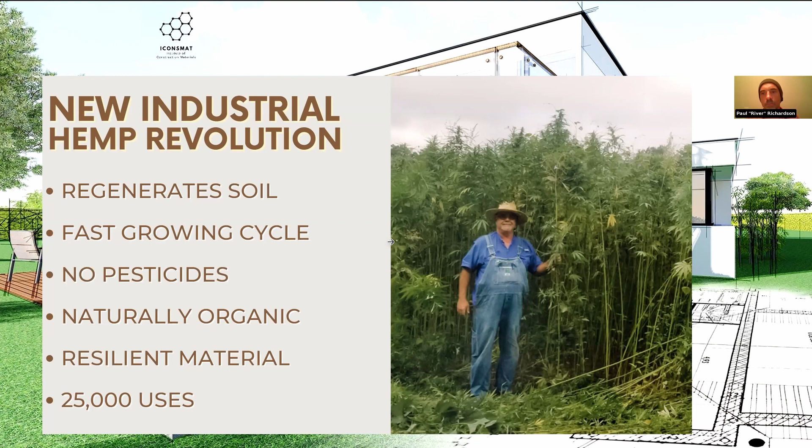Thank you. It needs to be dialed in that respect for the region, and a lot of nations are still working with the right seed genetics for their location, because the history of this plant, a lot of that knowledge and a lot of those seeds were lost, especially in the US, how it was outlawed for the last almost 100 years. So it's really coming back now, and it's taken off in the US like nowhere else in the world. I think when the US gets into something like this, it has a real momentum to move to the next level.

And these materials are really transforming how we think about our homes. These are mold resistant. It's a mold resistant material. It's a high pH material. It's a breathing system. So instead of the typical building envelope where we're sealing it as tight as possible, we're using all kinds of products to make our structures watertight and airtight so they perform to a certain level. And when we say perform, it means that they can be recorded.

Because it's all about creating systems. The building industry is being based on systems, wall systems, and other things that can be quantified, which I think is really to the detriment of the industry, because it's not allowed for natural materials to really get into the position that they should be, because it's hard to regulate a natural material. There's a lot of variations that happen in natural materials that are not quantifiable like a lot of these other building materials.

But things are shifting, and this material is really resilient in a lot of respects. It's fire resistant, it's pest resistant, mold resistant, as I was saying. It has a very high insulative value, especially when we use it as a fully encapsulated system. Typically hempcrete is being used in cast in place. Really, it's a non-structural material that comes from the center of the hemp plant, the stalk of the hemp plant, the shiv, which is processed down into small pieces around 1/2 inch or 1 to 2 centimeters, you would say in the metric, and mixed with a hydrated lime, mixed with the binder as well.

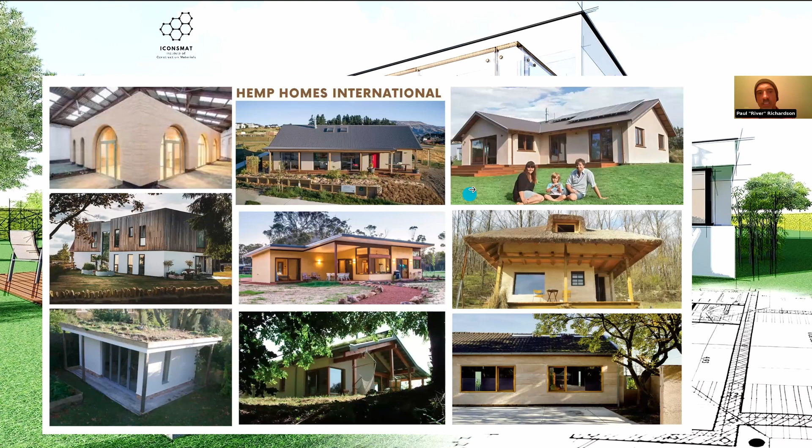And it can be sprayed in, it can be used in our wall systems, in our floors, and our roofs. As you can see here, the picture on the top right is a home in Australia. There are a lot of examples of these homes all around the world, which are really taking on a new form, creating a new type of architecture. Then you get into the interiors of these homes, and it's a really beautiful material. It's not just ecological, not only a breathing, healthy system, but a really beautiful home. We've been working with this material for the last few years, and the final product and experience of these homes is really different than a lot of regular homes.

My first hemp home experience was in the mountains of Switzerland, in the snow, minus degrees outside, 3 feet of snow, and we didn't have heat on in the house for 2 weeks, and it was like a fresh air environment. We're walking around in shorts and t-shirts. This was like a sea change for me as an architect, as to a building material that could feel like an outdoor environment. And then it can store heat energy in the walls because it has a thermal mass quality to it too.

But in the industry right now, there's a lot of issues around architects not really taking this on as a building material with their clients, mostly because the building code is not up to par. I've been in a process of getting a hemp addition on a house in California through permitting for almost 2 years now. So it's kind of crazy that this building material is not there yet.

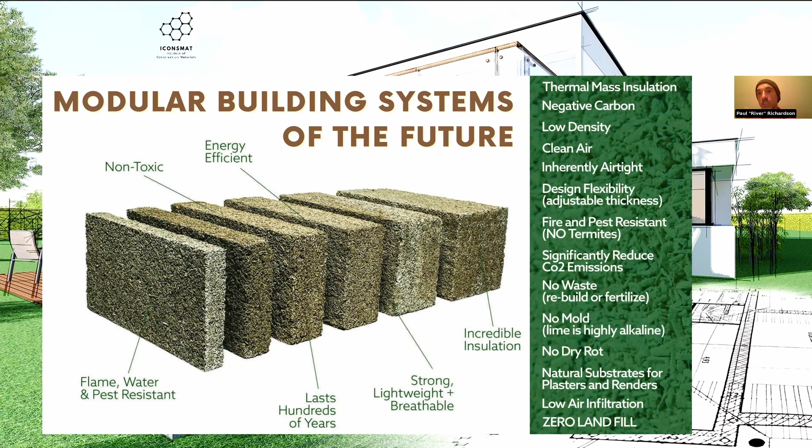The hemp building blocks are starting to come onto the market in the United States, and that's going to shift the building industry, I think, here. In 2024, we're looking at it being adopted into the residential building code in the United States. So there's going to be a big change in that respect.

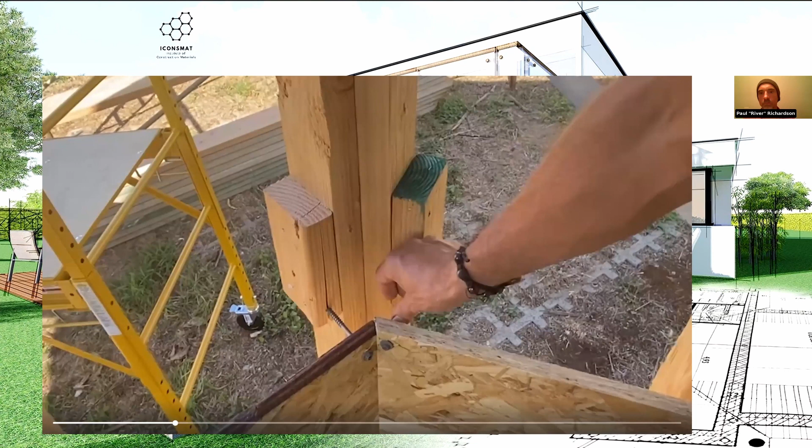These structures actually regulate the indoor environment in our homes by exchanging and purifying the very air we breathe, and they can be built in any climate.

We have put together a comprehensive course for ecological construction with Hempcrete, including live footage from actual builds, complete with project blueprints and resources to guide you through the process from design to finish.

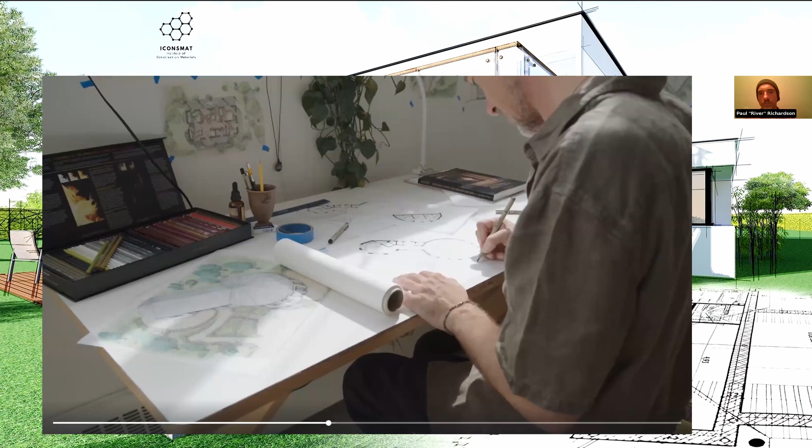We take you through the entire process and share all the details you'll need to know for building with Hempcrete along the way. After 2.5 decades working as an architect and project manager internationally on projects built with the standard unhealthy toxic materials, I shifted into natural building space in search for answers, and I've discovered the next level of construction through experience in hemp buildings in Europe.

What I quickly realized was that there was not a lot of information out there about building with this amazing material, even though they've been working with hemp for over 3 decades in Europe.

So in 2018, the same year hemp cultivation was legalized in the United States, I decided to start offering hands-on trainings in hemp construction. And in 2022, I began documenting the process so that I could offer a useful step-by-step course to show all aspects of building with hemp.

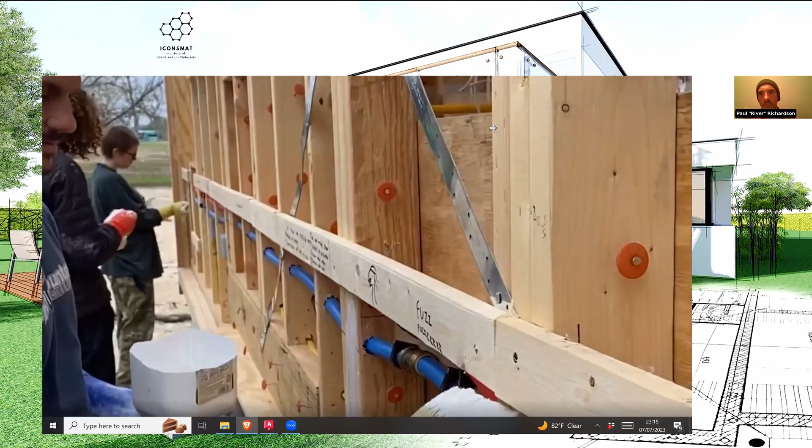And the great thing is that the course is ongoing and interactive. We continue to add content for new builds and host monthly Zooms where you can get your questions answered and meet other hemp builders. So we keep learning, and so do you at your own pace.

We'll provide an overview of the course, highlighting the benefits of building with hemp and setting the stage for an exciting learning journey. You get exclusive access to several of my architectural designs for hemp projects valued at over $1,000.

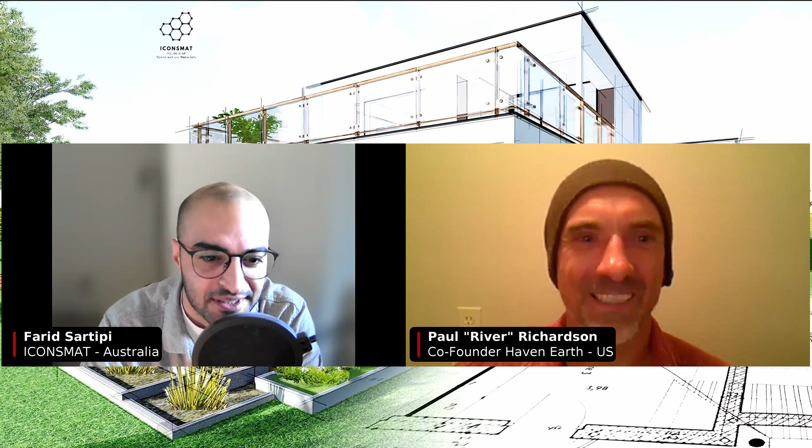Hi Paul, good afternoon, thank you so much for this wonderful presentation. I've never heard of using hemp as a construction material. Just had a quick question about whether it's being used as an insulating panel, being a thermal insulator or soundproofing isolator, or can it actually serve a structural functionality as well?

Couple of questions. Sound quality is amazing with Hempcrete. It has a really high decibel rating for sound absorption. So it's great for like a recording studio, it's great for a party wall between dwellings. And it's also a fire block as well. It's becoming a big thing in California because of all the fires, where they're looking to bring hemp in as a fire-resistant material.

It's still not classified as a structural material. It doesn't have the load-bearing capacity. It does have beneficial strengthening of the frame, so it will strengthen the actual wood frame of a house because it will encapsulate that frame and stop it from breaking, essentially, from snapping.

So we have some high-profile academics like Professor Veena here who might be able to get some research done about using this material as a structural element as well, because the University of Nebraska is actually working on a structural hempcrete formula right now, and their first tests were incredible. It got so hard that they couldn't break it out of the mixing machines, and yeah, it was actually too hard.

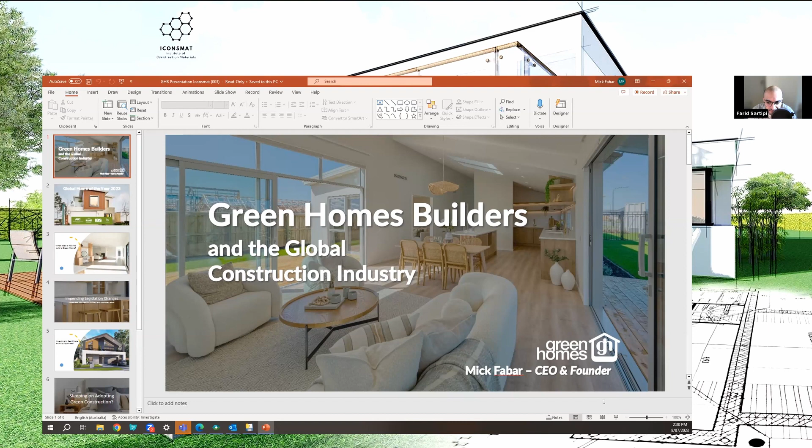Not sure, maybe try the bottom right corner, it has a presentation thing. Where is it? Bottom right. Yep, that's it. Oh good, oh yay, very nice. Thank you, Farid. All right, I'll mute myself and we'll pass it on over to Mick.

Okay, thanks guys, thanks for the invitation, happy to have a chat today. As per my introduction, I'm the founder and current CEO of Green Homes Builders, and we operate in Australia, New Zealand, and the US under a partnership franchise model, with over 100 builders operating under our brand throughout those countries.

As our name suggests, we specialise in green homes - homes that are energy efficient, sustainable, healthy, and environmentally friendly. We have a bit of credibility, I suppose - we've built thousands of green homes, the highest rating homes in Australia and New Zealand, and that's our plan in the US.

We've only been on the ground in the US for about 4 years. In January this year, one of our projects in Perth won Global Home of the Year from the National Association of Home Builders in the US - probably the biggest award a builder could win, I would think.

This particular home is a show home in Perth, Western Australia, in a warm climate. It's the highest star rated, most efficient 2-story freestanding home in Australia.

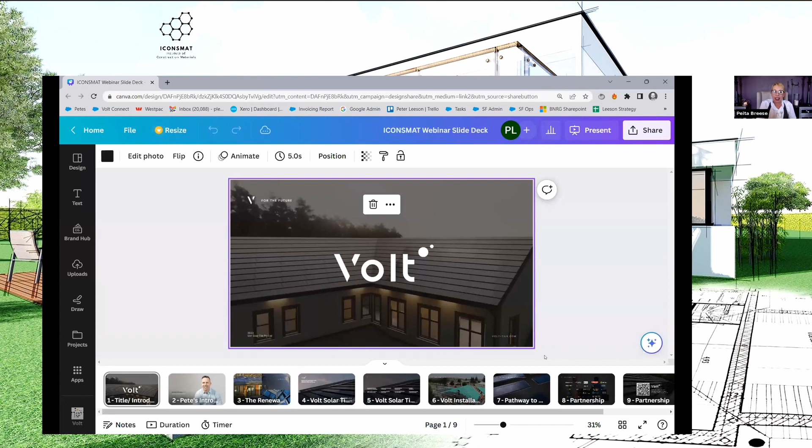Okay, so that was the introduction, and I think probably most of the presentations, I don't need to say too much. I'll talk about Volt Solar Tile today, which is an innovative new product. First, I'll just talk a little bit about myself. So I've been in renewables for 16 years, and been in the built environment for 24 years.

I'm an electrician by trade who has built a business up around solar farm development. We develop, build, own, and operate solar farms here in Australia and in some international JVs. We have our C&I and residential solar business, and then we also have Volt Solar Tile, which has been a product under development for about 8 years and was launched in October last year. It's now been installed in Europe and Australia. We're about to install the largest solar tile system globally in Turkey, and we're doing UL testing for entry into the US right now. We're launching our first project towards the end of the year.

So basically, in the built environment, there's a few different options when it comes to solar. You can have standard attached, which will remain pretty standard for flat metal roofs because you can't see the product, so it's the cheapest alternative for renewable energy. You've got facade and windows, whether it's a curtain wall or a solar glass roof or a solar glass window - very inefficient products, very expensive, and low energy generation because of the aspect of the sun. You optimize at a 90-degree angle from the sun, so it doesn't make a lot of sense because you're going to get low yield, and it's very hard to maintain the product.

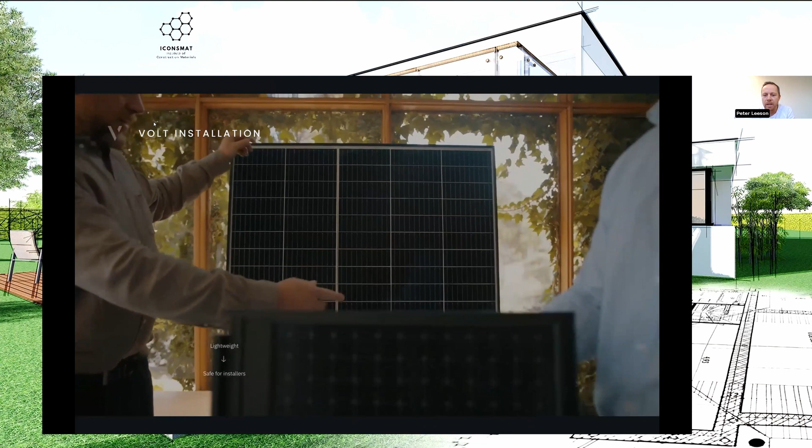So here's just a little bit of footage of a system that we installed in Adelaide, South Australia. That system just shows that it's a standard roof / solar tile. I'll wait for it to link back around in the loop, but basically the footage is just showing how the system interlocks.

There's a system that we installed in France in January this year, and you can see that's on the southern aspect of the roof, and it just integrates. One of our installers is just fixing a solar tile in, so it fits like a standard roof tile, except it fits from the back. Very easy to install.

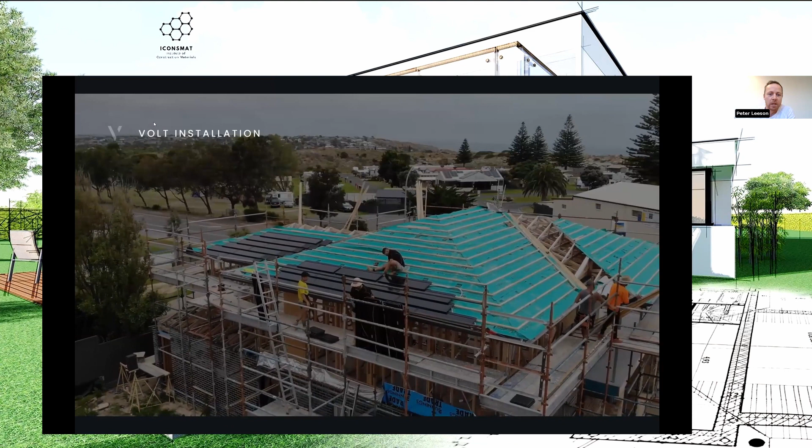The design of the product also has a very strong mullion at the top of it, which means from an installation perspective, you can actually kneel or put your foot on top of that solar tile and it won't damage the product. Here you can see the product's actually just interlocking in—two solar tiles can just lock in together like a standard roof tile. And the next one will show how it just locks into the watercourse and overall standard roof tile.

So here's the system again, just showing how our interlock works.

We've got a manufacturing business case put together to start manufacturing our product in Australia. It's a 2-stage approach. First, we'll be manufacturing the extrusions in Australia and cutting and assembling the product here using a laminate made by our existing manufacturer internationally. Stage 2, happening next year, is to actually make the solar module here.

There's one other solar module manufacturer in Australia currently, Tindo, who just makes standard solar panels. We will be pretty much the only solar manufacturer capable in the next several years of actually exporting in volume internationally, as we've already got the distribution channels and can compete at the same price due to the complexities of our design.

The extrusions are a big part of the cost of the product, because we need 4 different extrusions wrapping around solar cells to meet the same requirements as a molded product, and a roof tile is a molded product. So it's a very complex design, and assembly is very difficult to do unless you're doing it in volume.

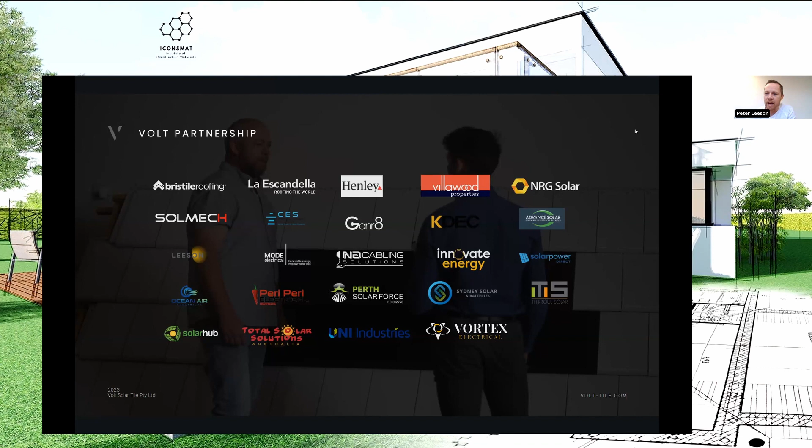All right, so Farid has a question for us. Hey Peter, thank you so much - it's brilliant to have an Australian manufacturer of such architecturally unique solar.

I'm not into the market as much as you are, especially in the solar market, but I remember a few years back there was a research project promoting use of graphene particles instead of silicon-based solar panels, which would enable generating more, better efficiency in terms of harvesting solar energy. Is that in the market as of today, or?

No, so we've hit about 26% efficiency. Theoretically I believe we can get up to about 30, but we'll be looking at TOPCon - that's using a very thin film cell on top of a polysilicon cell. So you're going to be adding about 3 or 4% to the cell efficiency.

One of the key things to understand, though, is we can keep pushing up efficiency of products, and that's fantastic, but we don't have a footprint issue or a land area issue. The issues when it comes to energy are cost and firming - being able to use that electricity when it's required. So the new cell technologies are getting there: graphene, perovskites, different thin film products, TOPCon cells.

From that context, I'm sure Anirban, you'd probably like to share a little bit of this journey around what we've been doing with the manufacturing space, looking at what has actually happened over the last many years. Perhaps if you want to talk about how different product opportunities are constantly being developed, but also equally importantly, as we've alluded to, the fact that whether it goes into any product opportunities, the critical focus of our microfactories always has been to be able to have these kinds of decentralized manufacturing capacities so that local supply chains of waste glass, waste textiles...

The whole ethos of microfactories has been very much around what can we do in the local regional setting? No matter where you are in Australia, and indeed taking this out to the world, we can actually source local materials. But the important part, ultimately, is that important question - are these products fit for purpose? Are we creating local jobs, for instance? So lowering our carbon footprint really comes from the fact that we can recycle, remanufacture, and be extremely efficient in the way manufacturing takes place.

But I might throw the question back at you, Anirban, if you wouldn't mind taking us through some of these diversity of products we're looking at, zooming in on each of them please. So I guess over the years, the way the product is developed - because we started from the scientific end, there was a lot of development in the engineering and understanding of the waste and what it can be converted into and what kind of properties it can meet.

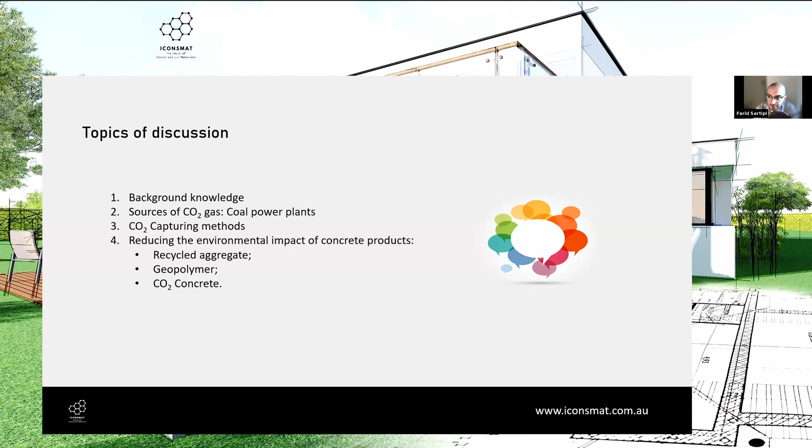Our topics of discussion today are a bit of background knowledge: the sources of CO2 gas, especially in Australia, like where we can find CO2, how do we source the CO2 gas, and what capturing methods are currently available. And also, at last, multiple types of reducing CO2 emission in the midst of manufacturing or producing construction materials, especially in concrete products.

I'll try to cut my presentation short to enable other presenters to present their outstanding achievements. As for the background knowledge, CO2 in concrete was a topic that's been introduced, if I'm not wrong, more than 20 years ago.

Physical entrap is the most basic approach to absorb or capture CO2 in concrete, applicable in recycled concrete materials, targeting recycled aggregate. What happens in the physical entrap approach is that CO2 is being pressurized in the chamber at the presence of recycled aggregates.

The claim is that recycled aggregates will start absorbing CO2 by mineralizing the carbon and oxygen molecules into different sort of molecules, which eventually makes CO2 gas, as a harmful greenhouse gas, disappear.

The chemical decomposition, however, which is the most recent technology — I guess one of these companies in the United States has started commercializing this approach as part of the CO2 concrete project — is applicable in all types of concrete, meaning you won't need recycled aggregate as a necessity in concrete.

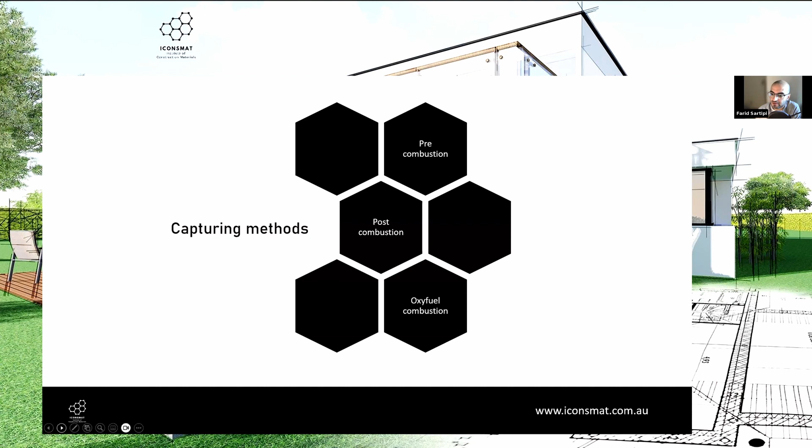The pre-combustion carbon capture is a technology that enables the introduction of oxygen and coal into something called a gasifier. Once the gasifier generates the CO2 and water, the steam goes inside this shift reactor, and that shift reactor will generate CO2 and hydrogen separately for us.

From there, we can entrap the CO2. And remember, these are all happening inside a coal power plant.

Post-combustion carbon capture, which is our main area of focus, is where fuel and air go into a boiler. The flue gas, which is 15% CO2, is being absorbed by amine absorbents.

So we have monoethanolamine — it's a bit of a chemistry background — or hot potassium carbonate, or chilled ammonia ionic liquids, and other techniques to absorb that CO2. But we take monoethanolamine or diethanolamine to absorb the CO2, and then we can mix it with some sort of concrete chemical admixture to obtain a high-performing CO2 concrete.

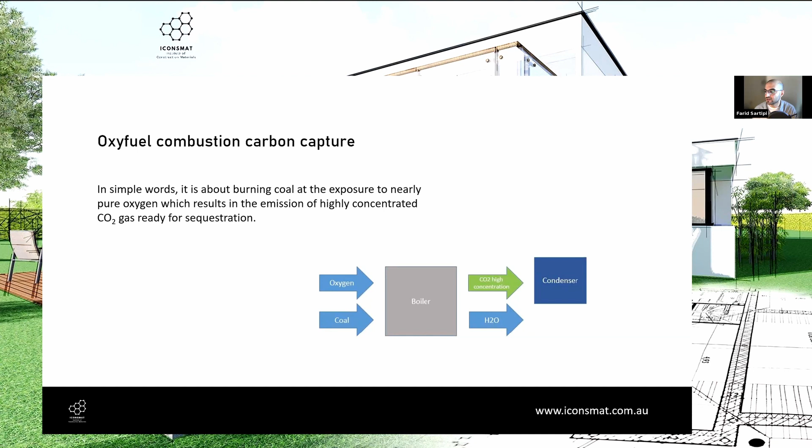So the other method is oxy-fuel combustion carbon capture. As far as I know, this project was introduced about 10 years ago and funded by CSIRO, but it's never been continued because it's been claimed to be so expensive, and the industry was a bit hesitant to uptake this technology.

CO2 capture from cement production is another alternative to think about. You can't just focus on coal power plants. We have other cement plants generating way higher, larger amounts of CO2 than coal power plants, so we may have to think about cement production or cement plants as well.

So far, we know how to find and source the CO2 that needs to be converted into other chemical forms rather than being released into the atmosphere, causing global warming and other harmful effects. Now the question is, how can we use CO2 in concrete? We know how to source the CO2, but in practice, how are we going to use that CO2?

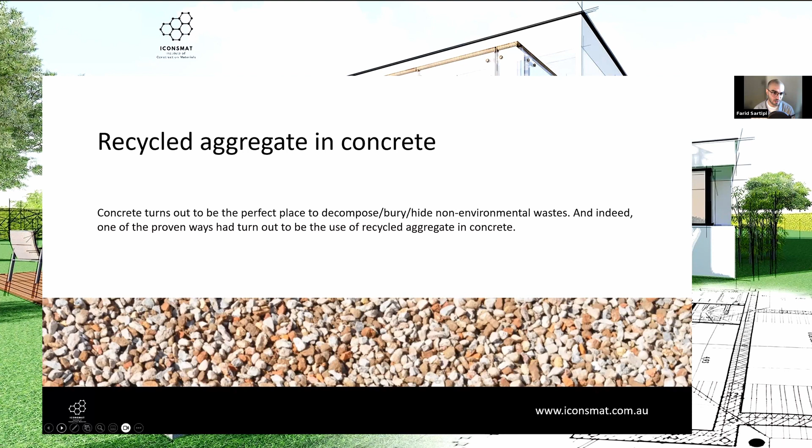The most basic approach is to have a recycled aggregate, and recycling is the most well-known approach to reduce the carbon footprint of construction materials. In the study, the disadvantage of using recycled aggregate in concrete is the low workability and low compressive strength obtained by mixing concrete with recycled aggregate.

There's something called geopolymer concrete, concrete without cement. We're replacing cement with fly ash and slag, plus something called an activator, which is normally sodium hydroxide, so a concrete block is made without having cement. By replacing cement with fly ash and slag, which are waste materials from other industries, we can reduce the carbon footprint of concrete.

Because of thermodynamics, these two variables can change the properties of the new concrete chemical admixture, meaning how much CO2 can be absorbed in this admixture and how much cannot be absorbed in this admixture as well.

I'm just trying to find my way back here. I think you need to end the presentation before I can return. There we go, I should be able to get back in now, hopefully. What's going on? Can I get back in? Oh yeah, sorry. Start video, sorry, I was trying to figure out how to get back in. I can't add to the spotlight. Sorry, okay, here we go.

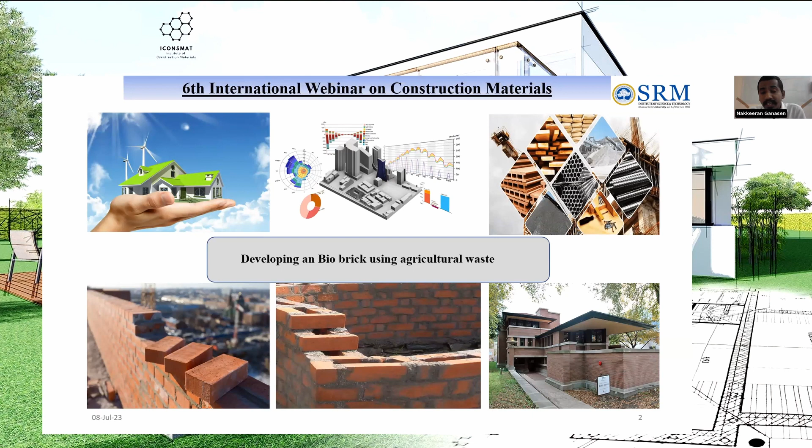My topic today is the development of biobricks using agriculture waste. Everyone knows building materials need alternatives because of high demand and depletion of natural resources, so we need low-cost, lightweight alternative materials.

We found that agriculture waste is dumped heavily in developing and developed countries. We worked in India, which is mostly an agriculture-based country, so we chose agriculture waste to implement in construction materials, replacing fine aggregate and coarse aggregate. We finally chose fine aggregate as the best option for bricks, as a low-cost material.

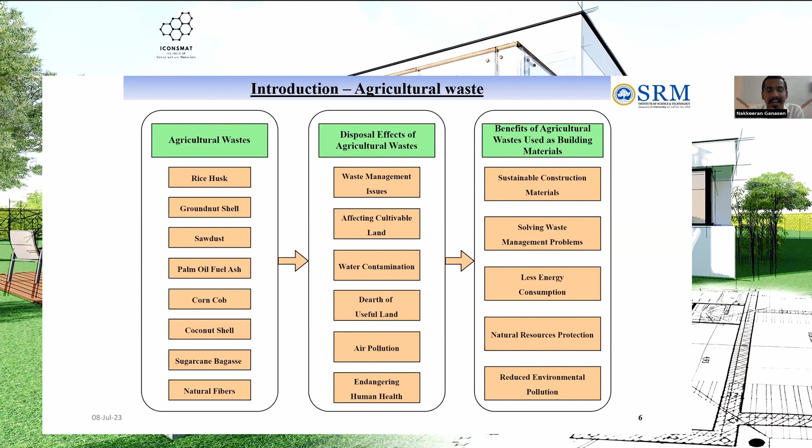These are examples of agriculture waste we get in India. If disposed of without reusing, we face waste management issues, water pollution, air pollution, and more. If we can use this waste in low-cost building materials, we can create sustainable materials, solve waste management problems, conserve natural resources, and achieve many benefits.

We did a small literature review on this topic, which is common for this type of research. We found many papers published on using agriculture waste ash as a cement replacement, for thermal properties in panel boards, and similar applications.

However, very limited researchers are working with raw agriculture waste in the construction industry. I prefer raw materials because they're easy to dispose of when we demolish construction, and it won't affect society much.

Most research has been done on materials like sugarcane ash, rice, wheat, and wood waste. Very little research has been done on groundnut shell. We prefer groundnut shell because it has very low density, and most people have never used groundnut shell as a raw material in construction. We chose it as a low-cost, low-density material for good sustainable replacement of fine aggregate.

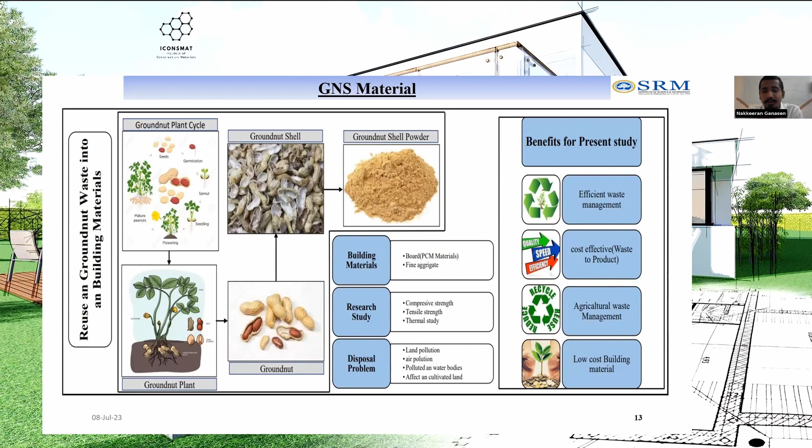It's been used in panels for thermal properties, but we tried a different approach using it as a replacement for fine aggregate because it's lightweight, low density, yet high strength. Previous literature shows it was only used in PCM boards as fine aggregate, not in concrete or biobricks - so we tried something new.

I used a very less amount of cement, just 10%, and recycled amounts of fly ash, lime, and GNS, and the sand. The sand used is very less, about 10% of the total brick, and 30 to 40% is replaced by this GNS material.

This is basic. First we collected the GNS materials and we need to grind it because the particle size is very big. So when using this, we cannot compress easily when making compression bricks. So first we need to grind the materials because the fine aggregate needs to be very fine. Based on that, we grind the materials using these machines.

Using this miller machine, it rotates for 10 minutes and we stop it, then we rotate again for 10 minutes and stop it, and we check until we get this fine aggregate truly as fine particles to replace the fine aggregate in the brick as a waste material.

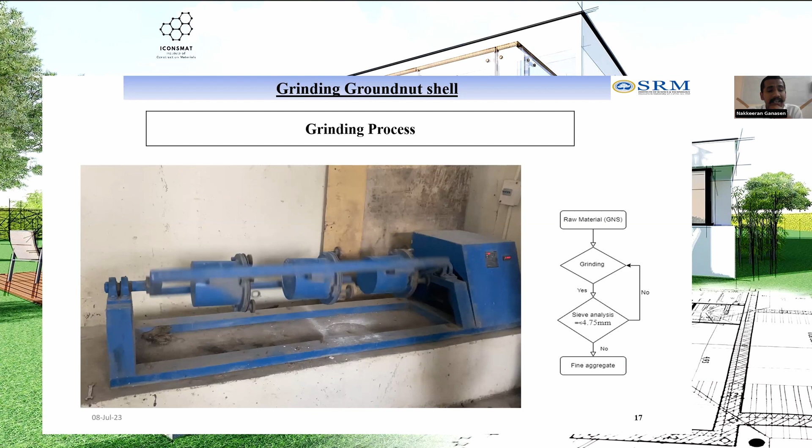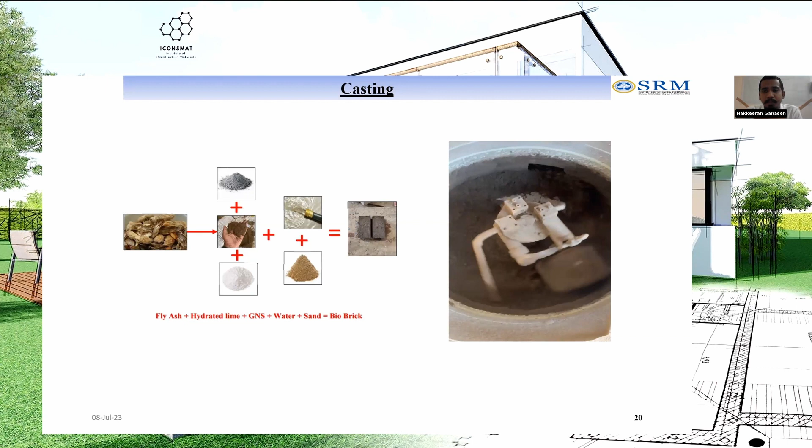These are the mix combinations we prefer. While using this GNS material, it is a little bit porous, so we plan to grind it properly and mix it in this kind of mixture.

We properly grind and mix these 4 materials - the fly ash, hydrated lime, and the GNS. While using this grinding, we reduce too much of the pores in the brick.

After that, we convert it and make it in the compression machine. It is like filling of materials, and we compress the bricks. While compressing your bricks, it comes out perfectly as a product.

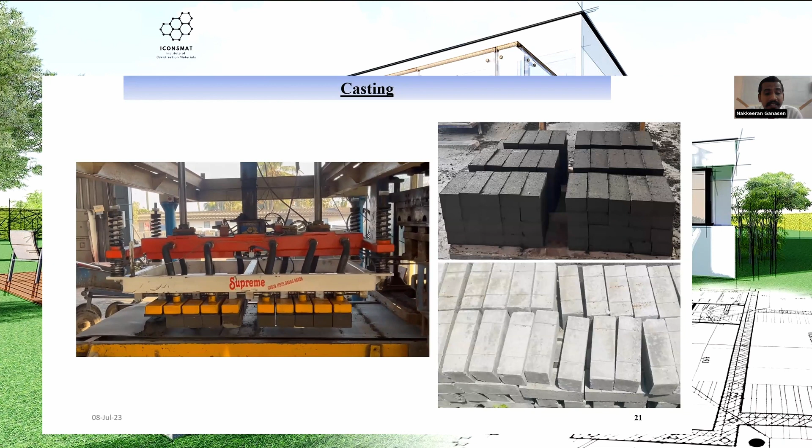When using this agriculture waste, most people using it in concrete mixing get a very less amount of strength and such things. While using this type of process and making a brick, its cost is also very less, and we achieve many things like using waste and low cost building materials, and everything else we achieve.

So we planned to stop at this optimization: GNS replaces 30% of fine aggregate in the sand. The brick is totally made with only waste material like fly ash, hydrated lime, and the GNS, with 10% cement and 10% sand as the natural aggregates.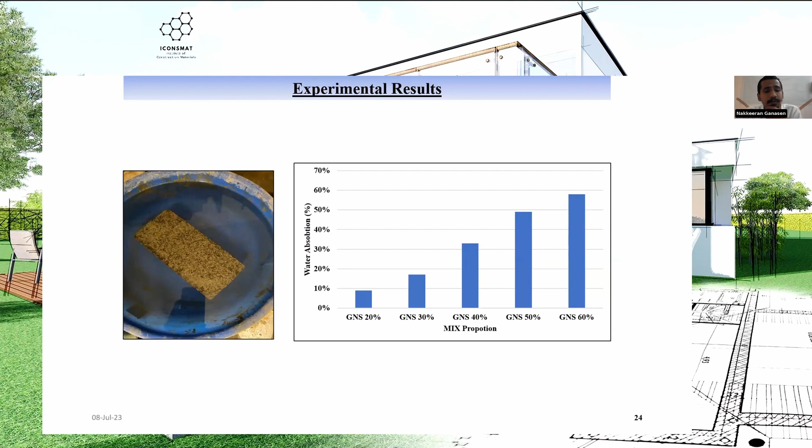So the cost of the material is very less. While preparing the material, the total process costs like 8 rupees per single brick.

While using these lightweight bricks and bio bricks, we get high strength, low weight, and it's environmentally friendly. We can use this in any climate. The materials are available in local availability. We can replace it with wood materials or whatever it is for construction.

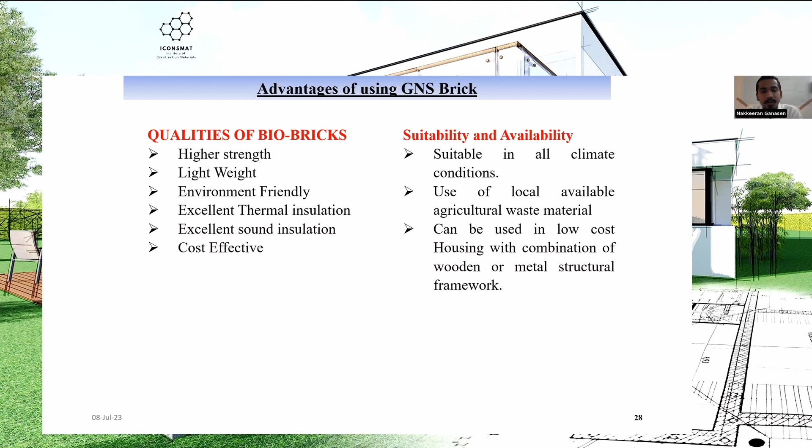We can simply construct temporary structures with this. It is very low cost and can be demolished and easily disposed of in society. It won't affect and may reduce the CO2 emission from disposal of construction waste, and it is better than clay bricks or cement bricks, whatever it is. We can use this as load bearing capacity also, because we're getting 7 Newton strength.

It is a first class bricks achievement, so we can use this eco-friendly sustainable building material as is. This is my conclusion. We have done many things which I didn't show in this PPT. We are implementing in real time also, with some orders for real time projects where we construct small motor houses, pump houses in local areas.

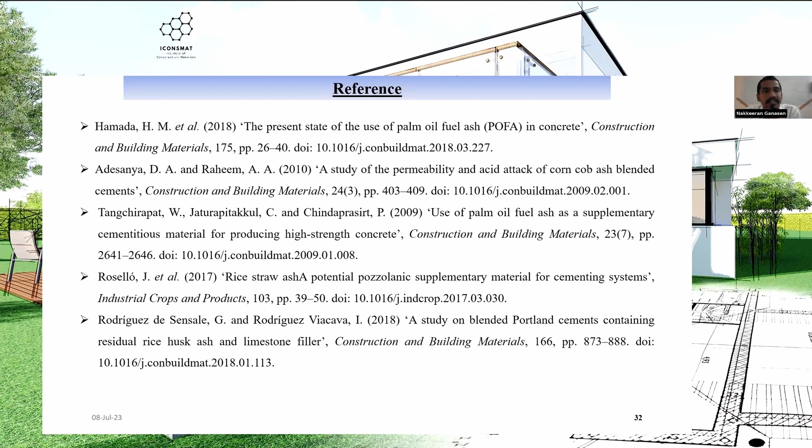This is a patent which I got from Indian patents, me and my guide, based on this combination and the strength and everything. These are my references. Thank you for the sweet time and for giving me this opportunity.

I think everyone will enjoy this one.

Thank you so much, Nakkeeran, it was fabulous. Just have a question whether it's ever been used on an industrial scale, in a real building, or is it just at the research stage at the moment? Actually, I didn't get you. So has it ever been used in a building, or is it just at the research stage at the moment?

No, actually we are using it in real-time projects. Now we got an order from one small construction company, and we're planning to supply a huge amount of manufactured bricks. Already we've done one small construction, a pump house in a local area, which was part of our research work.

So it's really similar to the first presentation by Paul. They've been using hemp and you're using some sort of biodegradable material in the brick. Thank you so much, that was my question.

This technology is kind of new for construction, because it's been used before for different kinds of AI in computer analysis. We have been trying to use a very cheap camera, like a $9 camera, and some kind of steel structures to complete our work, because a manufacturer in Australia had this issue and we would like to solve it. Actually, we got very good results with a very limited amount of money and help.

So basically we do this to detect quality assurance in old buildings, whether every single piece of steel is welded together well or bolted well together, because there needs to be a good connection between each steel part.

From the literature, we found earlier work from Park in 2015. He did some work, but didn't really mention whether these bolts can be detected properly or not. We would like to introduce this technology and develop it further to detect all types of errors in steel manufacturing, for example detecting the bolt and detecting the holes as well, so if we have any issues, we can figure out where the problem is. We've been using materials and technology here as our methodology.

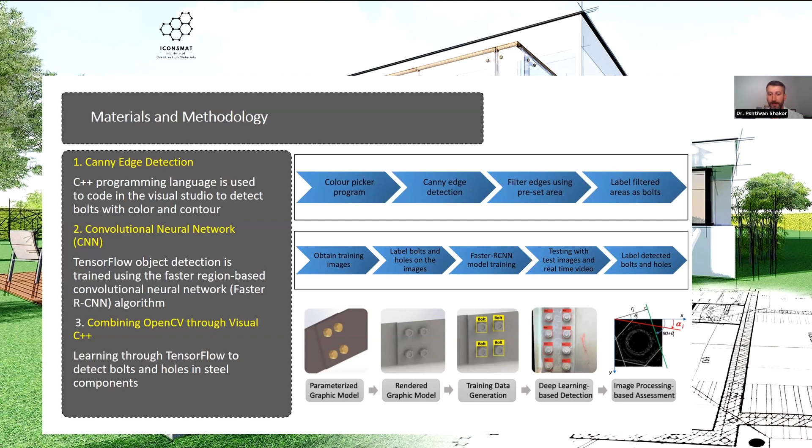We have been using canny edge detection, a kind of C++ programming, to detect all the colors and bolts together. And we have been using an algorithm called RCNN, or faster RCNN, which is very helpful to detect those problems. Combining both technologies gives us the location of the problems as well. For example, if steel parts don't have a bolt and nut, it detects it straight away. So this is basically the deep learning bolt detection process.

You need to go through this process until you get the results. As you see in the image, this shows how you take photos of the stuff and how you analyze it, like a kind of feedback from the algorithm. So you put in the input image for object detection, and select the area you want, because you may have a lot of stuff in the image and background, but you need to focus only on what you want to detect.

If you see in these images, it can be detected by region, and it tells you later on whether this is a human or something else. So this is how the RCNN algorithm works.

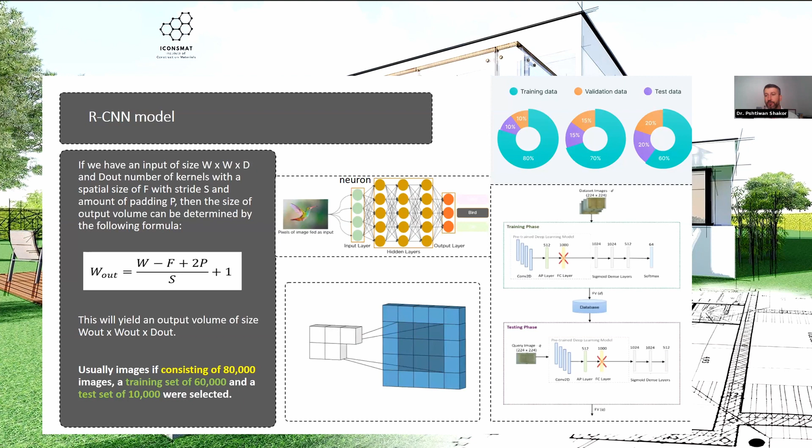So we have been running an experiment on the bolts. We made this custom setup with steel and bolts and nuts. I'm really thankful to Sredha, she did all the work herself, we just guided her. We found out how we can detect these bolts without holes, because it's very important for us to just detect whether we have a bolt or not, because if we don't have a bolt we may face issues like shear stress during the installation of the steel frames. So she used two kinds of cameras.

She used the ESP32, which has a very low pixel camera, about 2 megapixels. The other one they used was the iPhone, which is about 12 megapixels. So if you have a lower quality camera, you get a lower quality result as well. This is just for comparison, to check how it works.

In Canny Edge, you can change your images using a Gaussian filter, like different kinds of grayscale filters. And we have been using faster RCNN to detect all the stuff. As you can see here, faster RCNN has a region proposal network, so you can differentiate it from a regular RCNN network by itself.

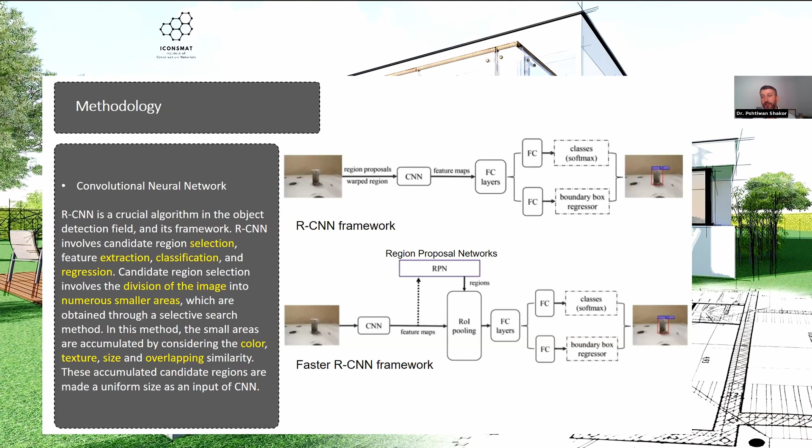The other thing we have been using is a kind of HSV, hue, saturation, value color picker program. From that, we can detect the bolts and nuts that we have. So once we figured out the different colors, you can see the different pre-set areas that you need.

From here, you can see the differentiation between the cameras we have used. The cameras used in the ESP are just 2 megapixel, which is the figure in the bottom photos. The photos above are from the iPhone camera, which is about 12 megapixel. You can see the difference in quality between those two images.

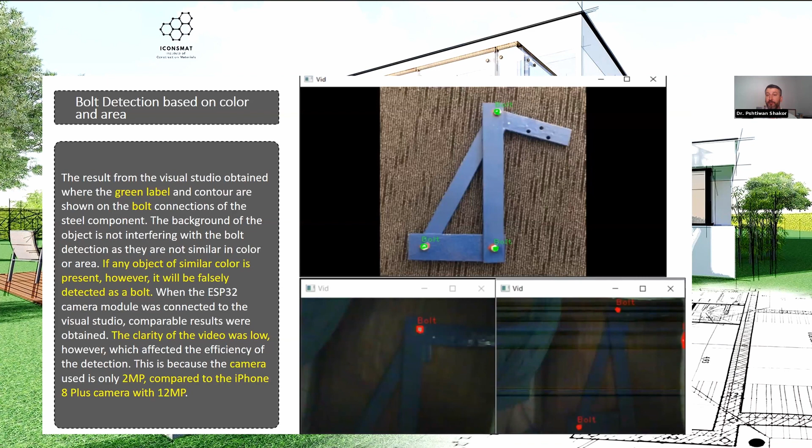We have detected the spots we need, showing whether the frame is connected together by bolts, indicated in green color, and the areas that are holes are shown in red color, so we can differentiate them.

For those figures, we've used different kinds of iterations. With higher iteration, you get a higher value in precision, which is called mean average precision.

For the ESP32 cameras, we got about 82% MAP, or mean average precision. But with the iPhone cameras we got very good results using different algorithms with help of TensorFlow and RoboFlow, achieving almost 95%.

At the end, I'd like to say this bolt detection was very successful. Even with different types of materials placed beside it, it will detect the spots needed and figure out where the bolts and holes are located.

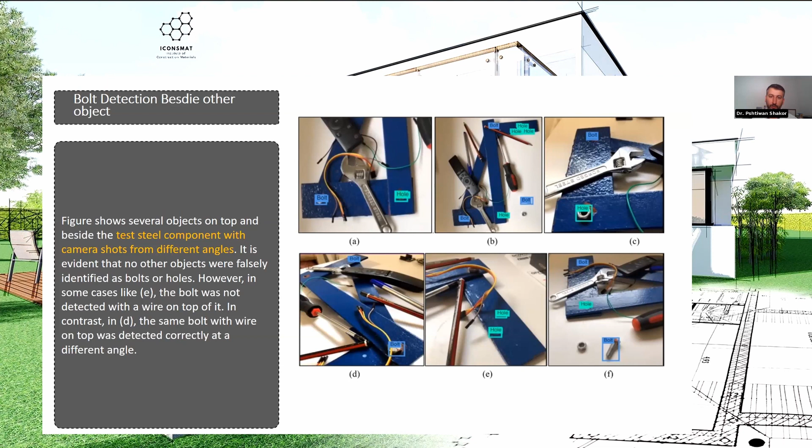As you can see here, green color shows the holes, and blue color tells you where the bolts are located. Once we figure out the places with holes, we go in and check it again, then use the bolt to attach all the materials together.

In conclusion of this study, we used canny edge detection and got very positive results overall. The ESP cameras have lower clarity compared to the iPhone. These results can be made more accurate using TensorFlow and RoboFlow to train more data; with even more images, you get much higher results.

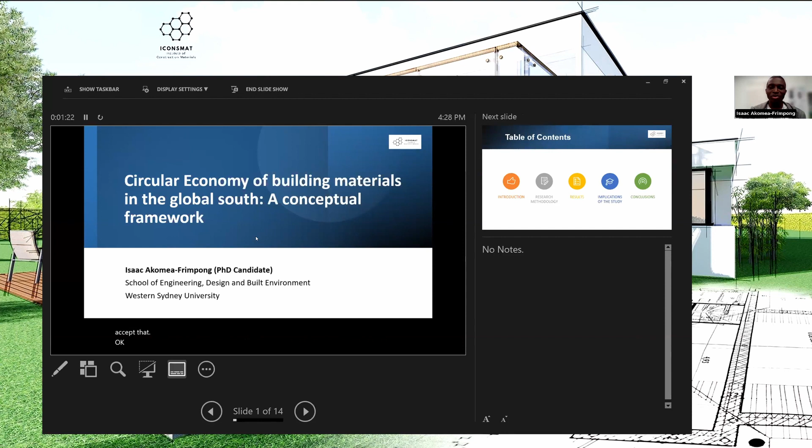Okay, so let me go straight to what I'm presenting today. I will present to you the introduction, the research methodology, the results, implications of the study, and conclusions.

Globally, what we know is that waste from construction building materials creates an estimated one-third of the world's overall waste, and at least 40% of the world's carbon emissions also come from building materials. This was reported by the BBC in 2021.

In addition, 34.2% of waste generation all over the world has also been recorded from building materials, according to the Environmental Protection Agency of the United States government.

A comparative study has also been done by the UN Climate, United Nations Climate, and they put their report out this year. They said between 2005 and 2020, compared to 1990 and 2004, the increment of waste from building materials has gone up by 10 times.

So all these concerns are generating a lot of discussions and issues of concern around the world. In the Global South, which I will explain when I get to the methodology session, we are seeing the same problem happening. This has resulted in health issues to construction workers and even the larger community, leading to lung cancer and other issues, all because of waste from building materials.

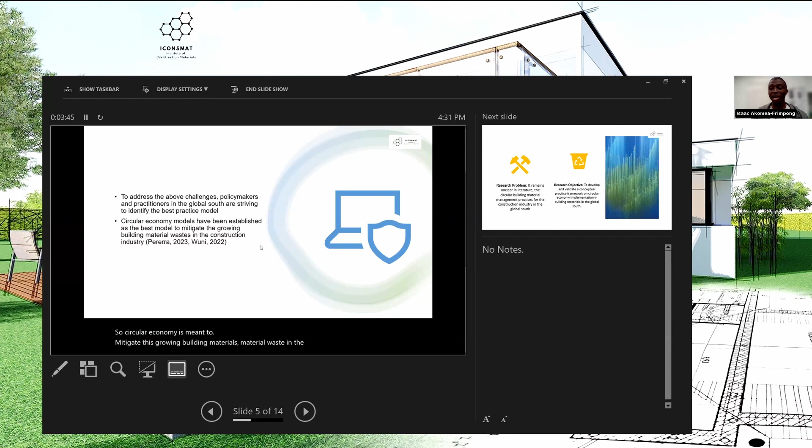So a circular economy is meant to mitigate this growing building material waste in the construction industry. But currently, what we know is that it's not so clear in the literature as to what kind of project management practices are related to implementing circular economy in mitigating waste from the building materials.

So in this study, what we are trying to do is develop a conceptual framework. This conceptual framework is more of a best practice framework, which will guide practitioners in reducing waste from building materials in the construction industry. We didn't only develop the conceptual framework from the literature, we are also trying to validate it. We want to see how it will work in the construction industry.

But before I go on to the methodology, what is circular economy? Because it's one of the key terms I've mentioned in this presentation. Circular economy simply means trying to design ways to reduce waste and pollution by keeping products and materials in use, and after using them, finding a way to regenerate them into proper use. This was explained by the Ellen MacArthur Foundation. This is in contrast with what we know over the years, which we normally call the linear traditional model, based on what we call take, make, and waste, or make, break, and discard.

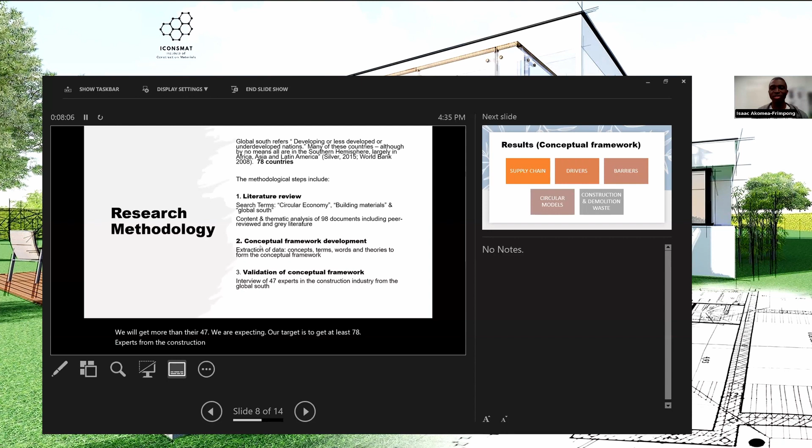So let me go to the results. This is our conceptual framework, made up of 5 blocks. In these blocks we have the supply chain, the drivers, the barriers, the circular economy models, and the construction, demolition, and waste.

The supply chain serves as the input, the source, because that's where materials come from. Here we try to look at how project managers can work on their supply chain to reduce waste by developing feasible supply chain models, which can help them tackle the waste they experience.

From there, we also have an aspect of the model which looks at the drivers. What are the critical success factors? What are the things driving circular economy implementation in building materials? And then we also look at the barriers - what are the challenges, what are the issues related to this - and the circular economy models.

The output, which serves as the end of this model, is the construction, demolition, waste, which is the last section of the model. Then we have tried to translate these 5 models into the phases of a construction project, because we believe the construction project is bigger than these 5 blocks. Normally, construction projects have the conception phase, the business development phase or financial closure phase, the design and construction phase, and the operation and maintenance phase.

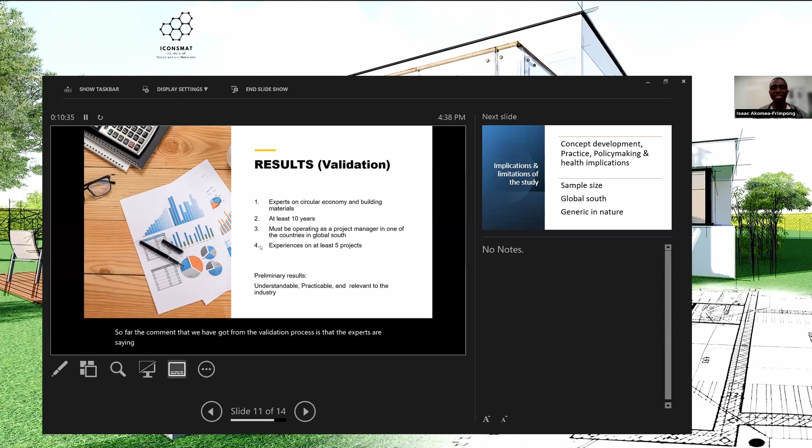So far, the comment we have got from the validation process is that the experts are saying our model is understandable, it's practicable, and to them it's relevant to the industry.

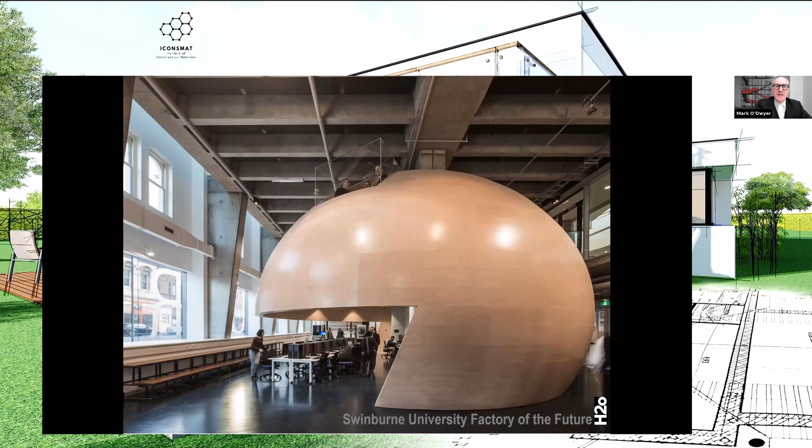What I'm going to run you through today is actually a culmination of a number of years' work. This image here is a factory of the future we did back in 2016 at the emergence of digital printing of objects, 3D objects in all sorts of formats. It's this beautiful little fit out we did over those years that looked at all of those approaches.

We've expanded that now to include concrete printing. So we've got a fit out next door where we do big object concrete printing, as well as metals and plastics and the like. So that's a bit of the concrete printing approaches there.

Now, all of this technology since then has obviously filtered right through the world in terms of Australia, Asia, and into wonderful setups within the United Arab Emirates, the UK, and the US. And what interested us is that Swinburne were wanting to do a fit out for their students to start integrating these parts into their work.

So we thought a key part of that would be to start integrating their outputs into the built product. And that's critical, because we're starting to build a picture that Australia is lagging behind a lot of the world in terms of integration of these approaches, because it's just not seizing the opportunity of the advances that have been done in the technology and where they might lead.

So we thought, all right, if we can make that bridge from academia to construction, where in academia we can start as part of the coursework, get the students to design some of the parts of the building, and then as part of the delivery of the building, we'll put those parts into the built product and start to showcase them. So it really becomes an active part of what students do in terms of how they look and see and feel things.

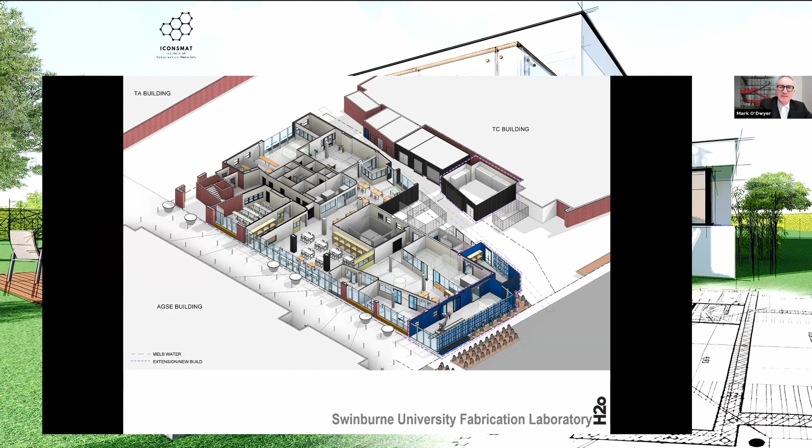It still has some of the old school approaches of working with sawn timber and those sort of approaches, but right through to a digital setup on this end where a robot milling facility is being relocated into this new box we're putting on the end of the building. And that's where we start to say, let's showcase these aspects of what the students are doing.

So that box, in essence, as you're seeing in this image here, is essentially a glass box - a basic glass box with a roof on it. And to that, we then start to apply a skin of steel to support a series of clip-ons that are part of the panels the students are designing. So there you see it in sections.

Essentially it's a glass box, and then there's an exoskeleton of concrete or steel manufactured parts. So it becomes both a showcase that can be changed over time because it's all set up by a modular system of panels. They can be screwed and unscrewed through the life of the building, so we can adjust the products that students are doing and change them over time and start to show some of the creativity going on.

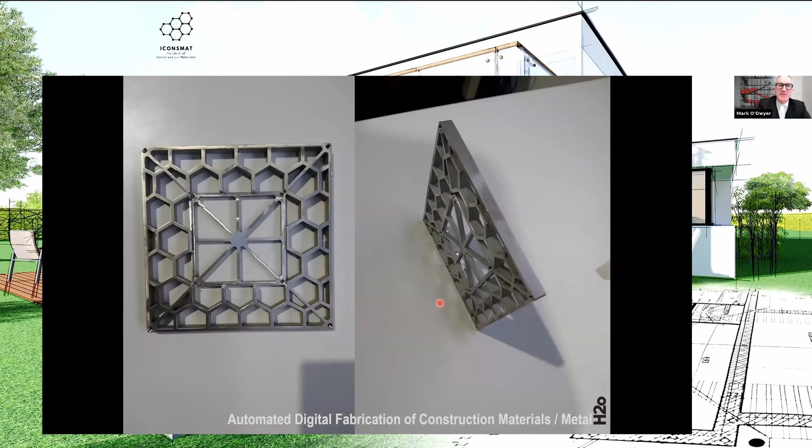This is just an example of what some of the students are coming up with. This is the steel approaches.

Pausing on that, all of the composites are either metal or concrete approaches because of flammability index requirements. One of the complexities of work like this is taking something from a student domain or academic domain and putting it into a facade material like this. It has certification requirements, and part of that is it has to be non-flammable. How do you prove that? You go through a performance approach in order to allow it to be that approach, because it won't have full certification like other materials that you use normally. So a little complexity to dwell on.

These are some of the concrete ideas that are coming out from the students, again, all digitally fabric designed and then built by robots as part of the screening. And what that'll be is eventually this facade here will be completely covered in those sort of outputs, similar to what we see in all sorts of games.

Where we are on the journey at the moment, we're just going through the assessment with the students as to who and what people are going to be manufacturing the different parts, so we can then apply that to part of the design that's going to start construction at the end of the year.

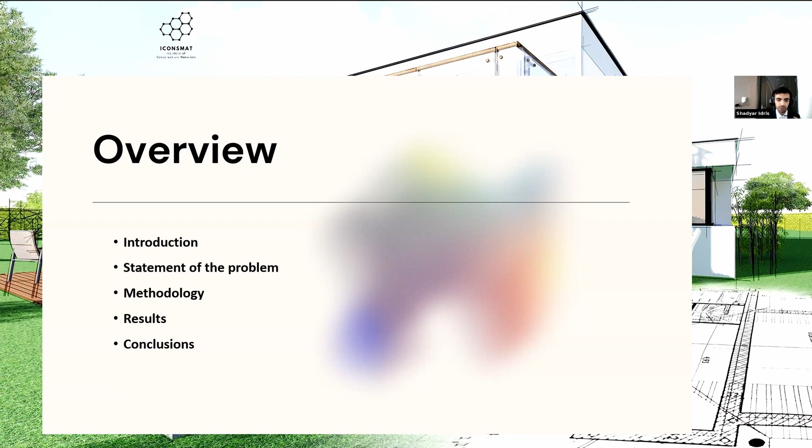If we see the introduction: imagine there's a big building made of concrete, and we want to measure its safety, its health monitoring. To do this, today we need to do it manually, but that's very labor intensive, and it costs quite a large amount of money. So I'm trying to solve this problem, as you can see here.

This is the statement of the problem that I'm trying to solve. We're trying to create a model that can automatically detect cracks in concrete surfaces and basically automate the process. As you can see, this is the manual method—it needs an expert to go to the site to label the crack and its direction and such things. This is very subjective work because every person has certain expertise in the area. But we're trying to solve this to create a standard model that can detect concrete cracks without any labor force.

In previous work, we have this paper, for example, that uses YOLO V2. YOLO stands for You Only Look Once, and the 2 is version 2. This paper is by Deng and his colleagues. His paper basically focuses on distinguishing between cracks, as you can see here, and handwritten scripts.

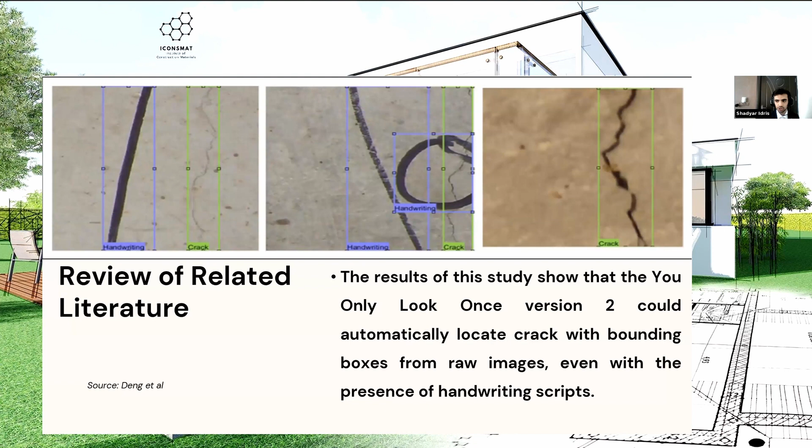That was his model. My model is different from this and other previous models in that you can detect the direction of the cracks, not just the cracks but also their direction. Because direction is important—if we know its direction, we know why the crack has formed, the reason behind it, and can address the issue and the maintenance much better if we know why it has been formed.

And now I'm going to talk about YOLO. YOLO is a model, an algorithm that has been developed first by Joseph Redmon in 2016. But since then, it has gone through many iterations, many versions. The latest one being version V8, version 8.

A very unique and important feature of YOLO is that it can detect in about 91 frames per second, which is brilliant because we can use it for videos. For example, if we give it a video, it can detect the object live without any delay.

And this is the detail of YOLO V8. This is the name of the model. I actually have two models, bounding box and segmentation. This is some details of the segmentation. It has about 261 layers, more than 11 million parameters and gradients.

Also, an important part of the model is these parameters. These parameters we can edit, we can alter. For example, we have the image size, which the default value is about 640 pixels by 640 pixels. And we have the batch size, which we selected as 16. Batch size is basically when we train the model, it goes through 16 images at once. Then we have epochs.

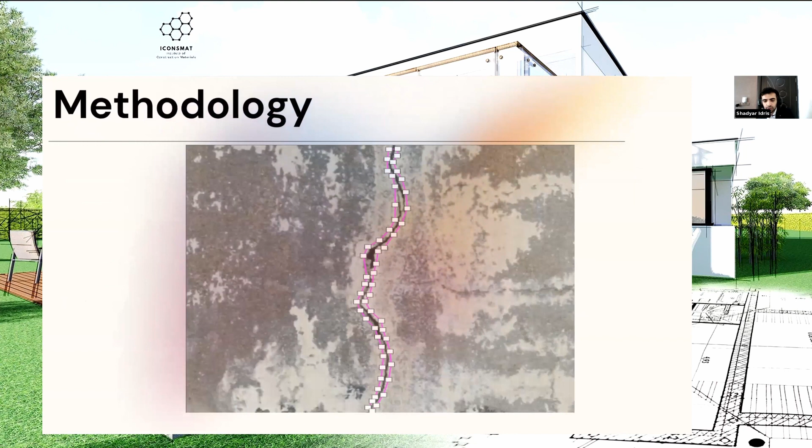As I said, I have created two models. The first one is instance segmentation. The second one is object detection. Object detection is rather basic as compared with instance segmentation because it only draws a bounding box around the detected object. But instance segmentation is more advanced - it basically highlights the crack, its entirety, its shape, and everything.

I'm going to show you more differences later. I'm going to talk about the results. This is the mean average precision of our model, the bounding box model. As you can see, at first its precision is very, very low, about 0%. But then it reached a height of about near 90 precision.

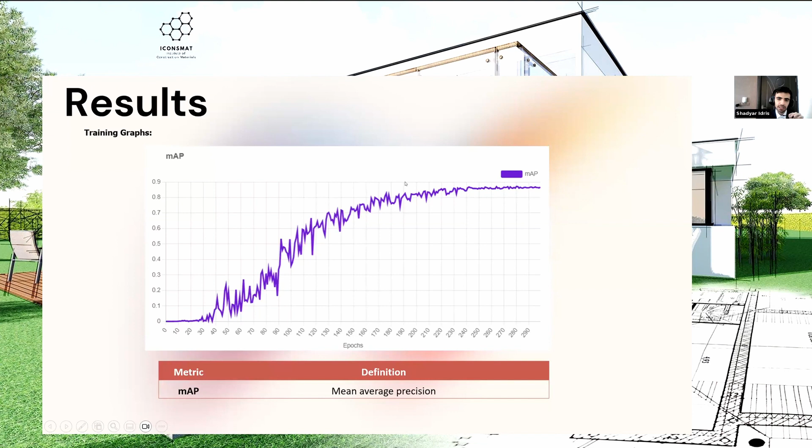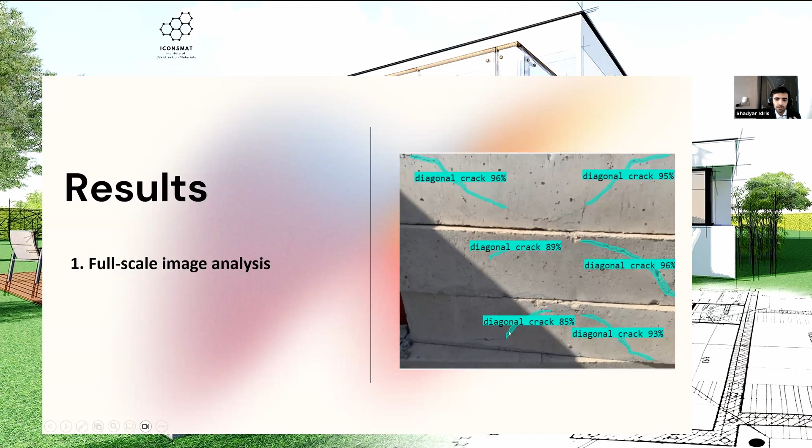This is the bounding box model. As you can see, it only draws a bounding box around it, nothing more. But when we look at this, the instance segmentation, it draws the exact shape of the cracks, and this can be very crucial to some industry or work.

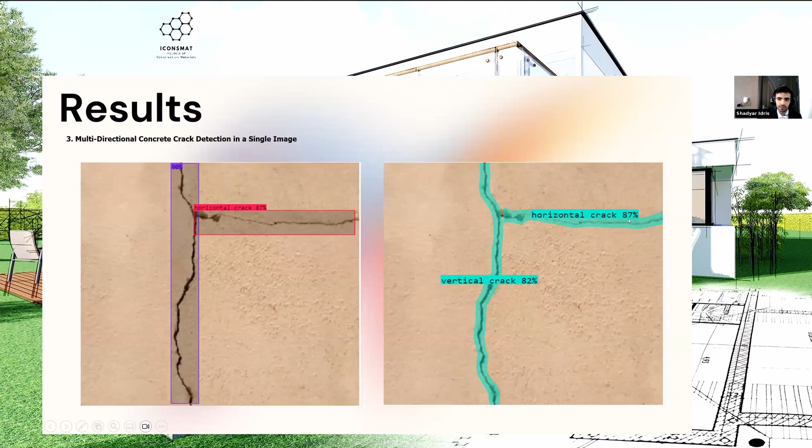To end my presentation with this conclusion: first of all, manual crack detection is quite intensive because we need experts to go to the site to highlight the cracks and see how large they are. The second point is that annotation is by far the most important step in creating a model like this, because when we annotate the cracks or the object, we teach the algorithm that's the mode, that's the object, that's the crack, that's its direction. So annotation is really, really important.

For mean average precision, as Dr. Pshtiwan talked about before, for object detection we have a MAP of 87.1, and for instance segmentation we have 88.5. If you have any questions, you can send me an email, but if you want, you can still ask questions, anything you like.

Introduction: construction is a labor-intensive process, as manpower is one of the productive resources in construction. Thus, productivity largely depends on human performance. Labor productivity in construction largely depends majorly on two factors: the size and type of the projects. The factors affecting labor productivity are labor organization, management, real wage trends, and one of the major vital factors is sleep deprivation. What do we mean by sleep deprivation? Sleep deprivation is considered to be loss of sleep or insufficient sleep, which results in problems such as poor concentration or irritability.

There are different types of sleep deprivation, such as acute sleep deprivation, which is one night or few nights without sleep. Chronic sleep deprivation is without sleep for weeks, months, and years. Sleep apnea is breathing repeatedly, heavy snoring, or feeling tired after sleep. Types of labor include skilled laborers, who have specialized training or skills, and semi-skilled labor.

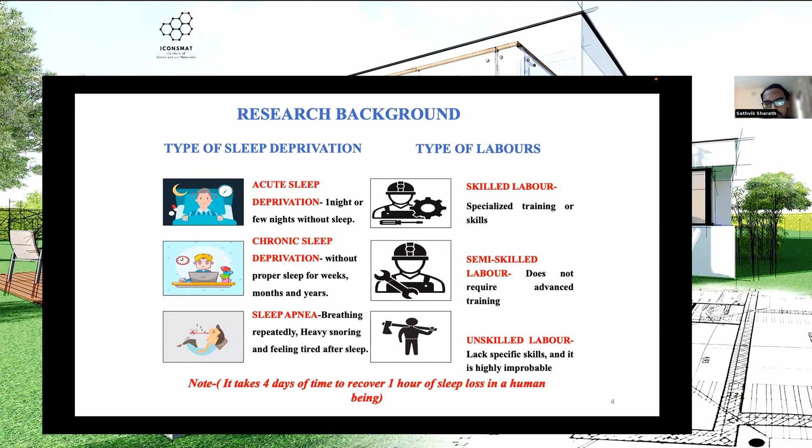Semi-skilled laborers don't require advanced training, while unskilled laborers lack specific skills. It takes about 4 days to recover from 1 hour of lost sleep. We used a wearable biosensor, specifically a Fitbit watch method, to collect data from the laborers at 4 intervals.

Is there anything else you had to add at all, Mark, while we wait for Hedwig to pop in? Because yours was quite cut off, wasn't it? No, it's the way of life. Farid had a question about how you get certification or some sort of formal process for objects like this that are emerging. So it's a good question for it.

It's complex because codes and regulations haven't really caught up with how the world's developing with these products, because the materials they're made from, how they're made, and what they are is emerging and quite various, particularly the concrete ones where the mixes are usually a specialized mix to allow that plasticity for them to be pumped out in the printing process.

We've found the best way around that is to get a compliant group of both building certifiers, but more importantly, a facade contractor or consultant that'll review it from first principles, taking it all back to the beginning. Going through a process of formal testing is both expensive and time-delaying for these sort of one-offs. But if you get facade consultants, they review the mix, they review the characteristics, they review what it's trying to do.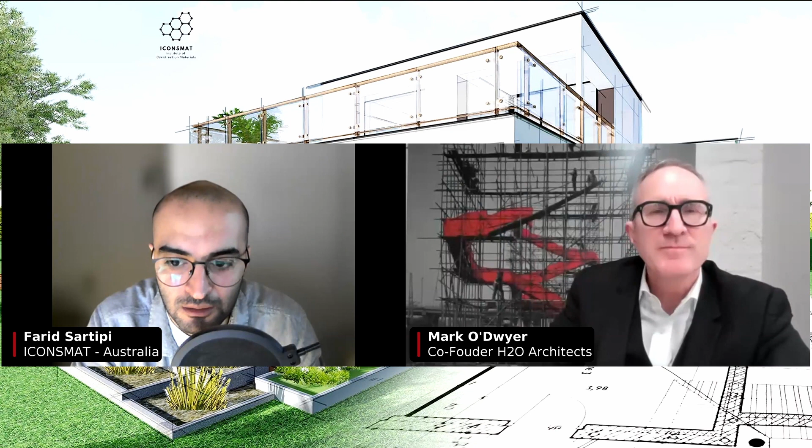I'm thinking about, let's say, having a land release approval from a local council. They're definitely asking for a method of construction, which 3D printing is not one of them at the moment. So based on your recommendation, facade constructors, facade regulated bodies must have prepared something and then disclose it probably with the local councils.

Yes, because if you look at building certification or any form of certification, there's a whole group of registered building surveyors that approve these things, and they look at what's called deemed to satisfy - meeting the codes and regulations, which is called deemed satisfied. They always have the ability to go a performance approach, where an outside party looks at it from first principles, which is one of the beauties of the Australian process. So it's finding the people with the time, the effort and the smarts to go down that first principles performance approach - that's the short version.

Does that answer your question? Yeah, definitely. I was just wondering how the process works traditionally in Australia throughout the past.

I think we've got the next speaker. We've got her, we've got Hedwig in the house. Hello, okay, we're bringing you in now, my dear. One second. Thank you very much for filling in for us there, Mark. Hi there. Hi, I'm so sorry, I thought we had a longer delay. Oh, there was, but we lost a person, so that's why we're kind of caught up a little bit now. Thank you so much for joining us.

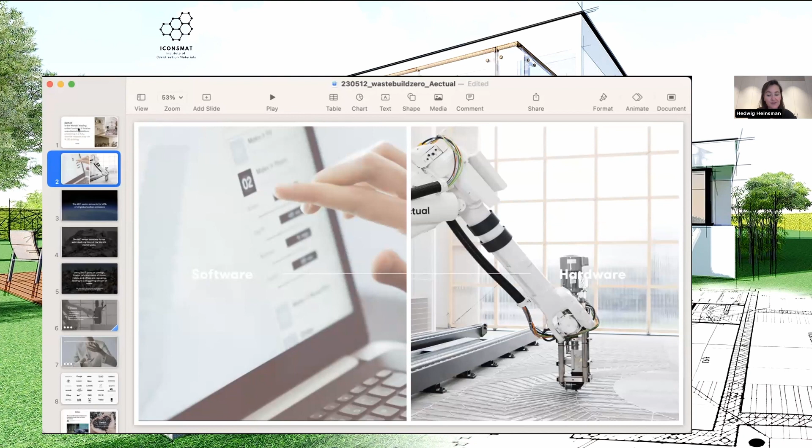Sorry about that, my daughter is just walking in. Lois, you have to go away.

The AEC industry accounts for some 40% of all global carbon emissions and about a third of all the waste in the world. That's, of course, really a bad thing. And what most people don't know, but what is just as bad, is that interiors actually are incredibly polluting.

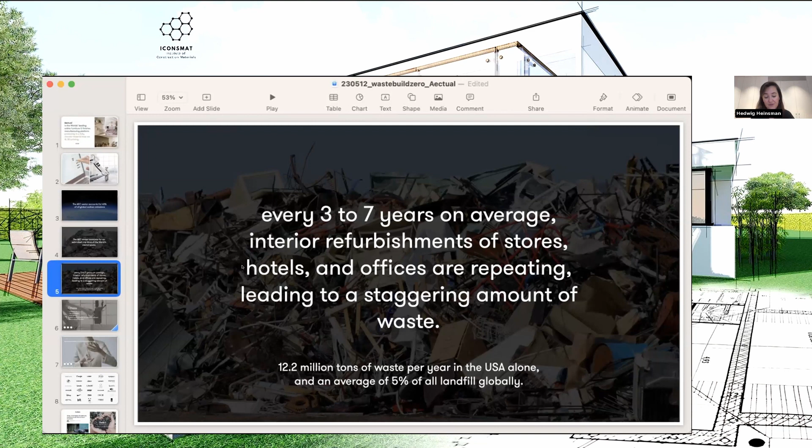At Aectual, we really try to find a solution to the recurring waste that happens in the interior industry. For the sake of time, I'll go a bit quick, but we have our own 3D print facility in Amsterdam, and we now also more and more print in other areas in Europe. That's really exciting. We print with several materials, for instance, plant-based plastic that we developed with Henkel, but also now the recycled inner foils of drink cartons made in collaboration with Tetra Pak.

We have loads of great clients, and we also work with great architects. And the nice thing is that more and more press is picking up on what we do. Recently we got a great article in Forbes magazine calling what we do the ultimate upcycling approach.

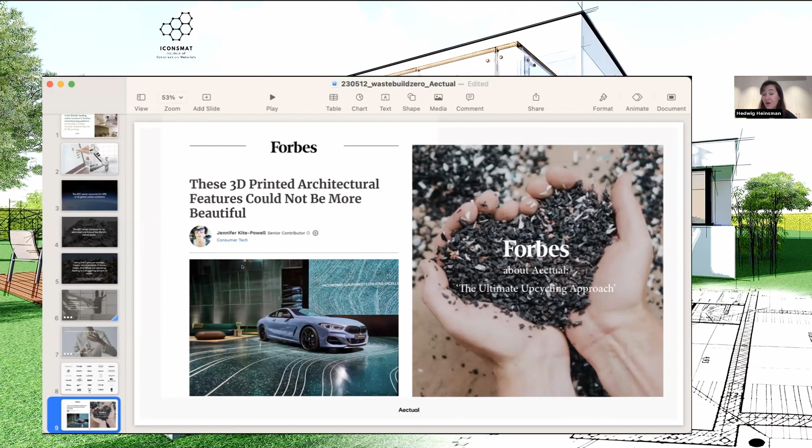So how does it really work? Our clients, architects, but also contractors and project developers, can go online and pick a product or system, and totally configure it to their taste or regenerate it for them, so the products totally fit the interior design. Then a 3D print file is generated and it's 3D printed on demand. The products are finished and can be picked up or transported to site, and the local contractor can install it. After use, we make sure the elements are taken back and shredded by partners, and then it can be reprinted.

In theory, this process can just repeat almost infinitely, depending on the kinds of materials you work with. Some materials you can recycle without adding any new waste material for at least 10 times, which is really amazing.

So on the one hand, we have configurable objects like poufs and planters. And on the other hand, we have architectural finishes, so all kinds of wall panels, room dividers, screens. I'll show you a few.

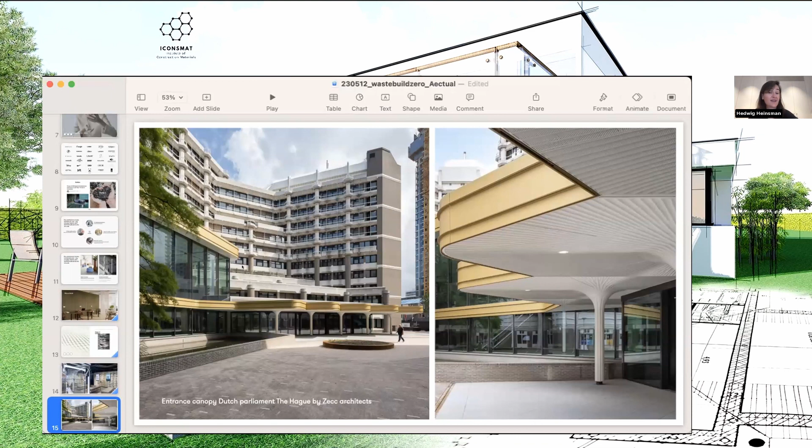For instance, a weave system, panels that appear almost woven. This is a design that's been applied by Nike. But you also see it used as a temporary canopy for the Dutch House of Representatives in the Netherlands. In a few years from now, when the historical House of Representatives is finished after refurbishment, this entire canopy will be dismantled, and it can be shredded and reprinted again.

What's nice is that you can make all sorts of very intricate details. For us, that's very simple because it's all digitally developed. But the same system can also be applied on a much smaller scale, for instance here as an acoustic absorber, because then there's also a PET felt added to the back structure.

Another example: these are sound wave panels developed by Gramazio Kohler in collaboration with ETH Zurich. These panels diffuse sound - the shape of the waves is made in such a way that it really optimally diffuses the sound waves. The nice thing is these panels are now also applied in several projects in the Netherlands, not only at ETH but also by commercial clients.

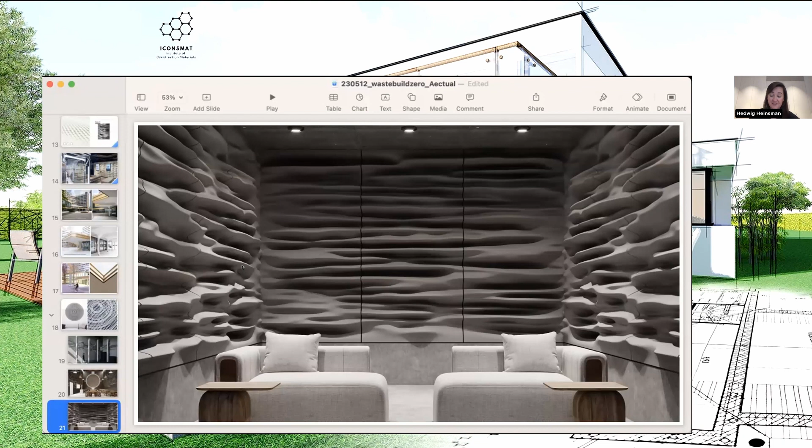So we also really try to find new economic models for architects to sell their innovations - all kinds of panels that allow custom shading, because of course every panel that we print is custom. So it's very easy for us to make custom panels, patterns and logos. We do a lot of these screens for hotels and restaurants, but also fairs.

What's interesting is that sadly, at fairs there's a tremendous amount of waste. But in our case, after the fair we take the materials back, they're shredded, and directly reprinted into new materials. An example is a permanent exhibition interior at the Museum of the Future in Dubai, by Atelier Bruckner, a German architecture firm - all sorts of other screens that almost appear crocheted.

So I think it sort of speaks for itself. What's really interesting is that you can suddenly generate an infinite amount of design instances with our parametric designs, and you can really tailor make it.

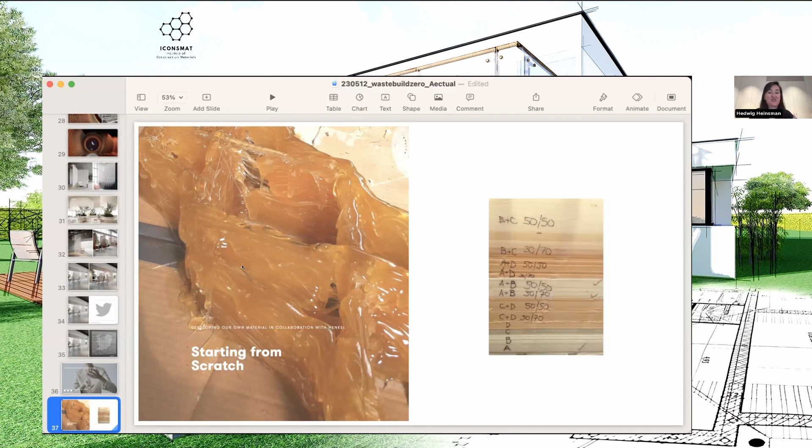About the printing, we really see it as a craft. It's not a matter of pushing a button, it's really a lot of R&D. This is, for instance, how we started printing with our plant-based material. It was almost like a kind of syrup, and it really took us more than a year before we mastered the material.

But now we really know about all the properties of various materials, their heat, their speed, but also the properties of products, so the UV resistance, fire resistance. And that's why now we have all kinds of certified products, like for instance, our wrap paneling, which you can print in a way that it wraps around the building.

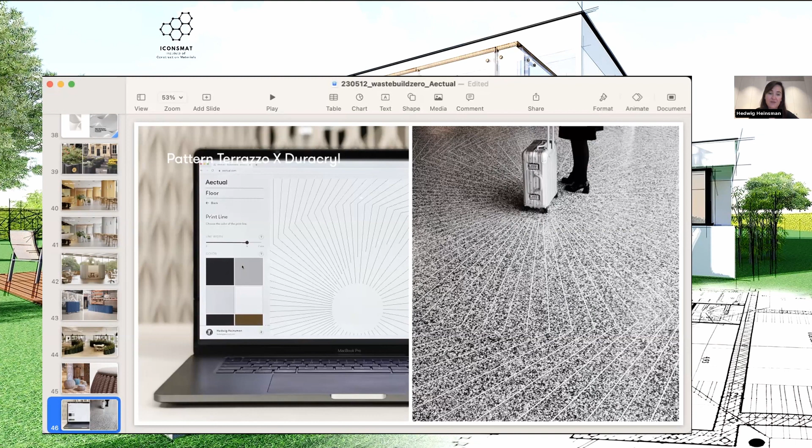Roofs, also flooring, that's a combination of a terrazzo with a plant-based binding agent and real marble and printed patterns that we make. So you as a designer can create any kind of pattern with our tool, and then it's 3D printed in segments. Those segments are then brought to the site and they're welded together by heat.

And then you get these really big surfaces. Then the terrazzo is poured and sanded back, and you get these really nice floors. This is, for instance, a small project by Zaha Hadid Architects. The previous was by Patricia Urquiola. But also some examples by Nike, for instance.

But perhaps my personal favorite is more meanwhile use, so really bigger objects, small architecture. I think that really the commercial projects of Aectual are about 99% all interiors, but gradually we more and more also step into the built environment.

So we're currently developing facades and also these pilot projects, like for instance, this urban cabin, where we tested all kinds of ways of connecting joints. How can you insulate with the material by 3D printing air pockets, for instance?

This was a tiny Bauhaus that we printed two years ago when it was 100 years Bauhaus, and it traveled Europe. And also here you see all kinds of products that we developed.

I think I'm almost out of my time, so just a few more pictures. I was about to say just take your time, because we don't have anyone after you right now. The other person hasn't shown up, so you can relax, so you can actually get a breath. Okay, that's good to know. Waiting for a moment to say it's okay. Okay, good. Yeah, because okay, good. Thank you, you can take your time. Thank you.

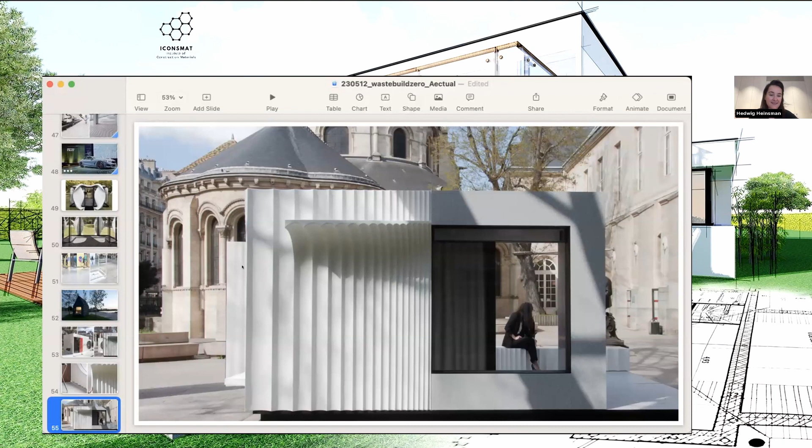So a glimpse of our factory. As you can imagine, it's getting crowdier and crowdier. So the great thing about printing, of course, is that you can send files digitally and then get it 3D printed also locally. That's something that we're currently really focusing on as a platform, which is really exciting.

So who knows, maybe in a while we can either offer our products directly 3D printed in Australia, where we can collaborate with local partners. I already saw some interesting examples in the previous presentation.

Maybe I think it's also good to emphasize the notion of circularity. One of the great things about 3D printing is that it's very easy to shred the material afterwards, and then it can directly be fed into the printers. This also doesn't require a lot of electricity or other steps in the process. So it's literally the shredded material that directly feeds into the extruder.

Most materials that we print with have a life cycle of some 7 to 10 times, and then after that you can still reuse it, but you have to add a certain percentage of new waste material, some 10% in most cases. So in that sense, it's a very interesting circular loop that we facilitate, and that's also now something that as a company we really offer.

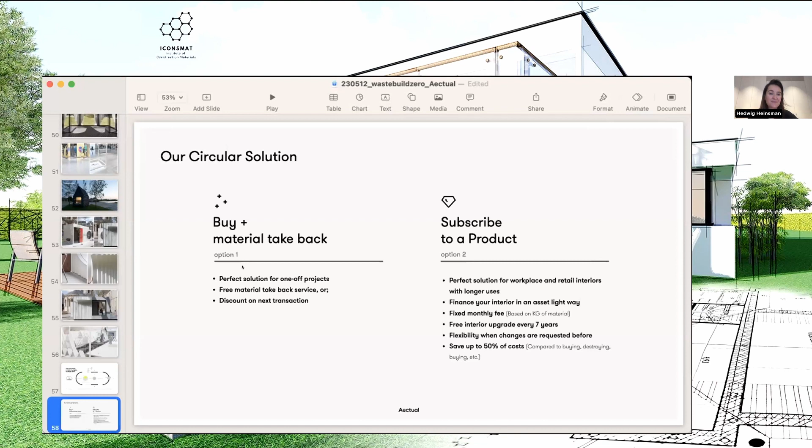But something that's even more exciting is that in the future, hopefully, we can become something like a material bank, so that people can really subscribe to a product and basically just lease the material for an X amount of design iterations. That's something we're currently investigating, and on a small scale, sometimes we already do that.

So this is a small example of a project last year that we did with Hermes. This was a kiosk, a temporary kiosk, and it will reincarnate again somewhere in the future.

And on a bigger scale, I think this is quite a nice example. This was a pavilion designed by Pragma Architects, and we entirely printed it last year for a horticultural exhibition here in the Netherlands. This was the UAE pavilion of the United Arab Emirates.

The white claustra wall that you see here, and also the green facade panels, were printed by us. The building was there for 9 months, and after that time we took all the items back and they were shredded. The material has already been reused in all kinds of new products.

So this technology also really facilitates a new kind of ephemeral architecture, which can really cater to local needs, and then reincarnate into something else where it's more needed. I think that's really fascinating.

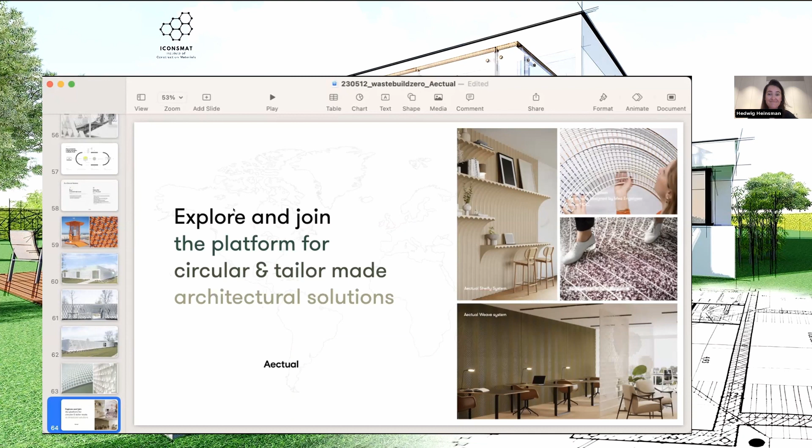That is so awesome. Mark, do you have any questions for Hedwig? Do you have anything that you two want to chat about in the presence of others?

Just fantastic to see how well developed it is, and that was sort of the intro of what I said. I think Australia... well, I'll rewind. We did our first 3D printing facility over 10 years ago, and it's just sad to see that Australia's still at the starting gates when the rest of the world's moving so well, as we can see there. So it's part of why we're trying to encourage the groups we're working with to start making it more public, start working with the students to really excite them and get it out there, as opposed to just dabbling in it. Because this is exactly what the world's headed for.

Really wonderful work, Hedwig. Well, thank you. We always love to have students in our team. It's really nice that after COVID we can travel again, so if people are looking for an internship or just want to come and visit, they're most welcome.

Yeah, I'll be dropping in next time I'm over. Yeah, you really have to. So wonderful, we're making connections here, people. This is so great. Thank you both very much for your time. I wanted to make sure you had a moment to chat to each other, seeing as you had something in common a little bit there.